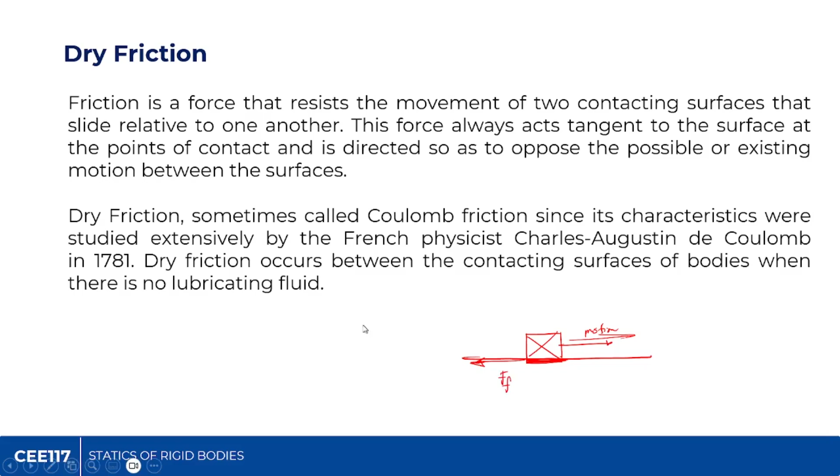Now, dry friction, sometimes called the Coulomb friction, since its characteristics were studied extensively by the French physicist Charles Augustin de Coulomb in 1781.

Dry friction occurs between two contacting surfaces of bodies when there is no lubricating fluid. Kaya sinasabi siyang dry friction. Kapag may lubrication na in between the interface or in between the contact surface, then that's a different type of friction, may fluid friction na yan involved.

Now, similar to this one, ito yung basically representation lang, no? In reality, yung makikita natin is a box only and a surface or plane. Kumbaga, ito lang yung makikita natin in reality. And then, of course, meron tayong weight ng box, then meron tayong force na in-apply, that is force P.

Pero, kung titingnan natin yan in microscopic level and in mechanics na sense, etong surface na to dito, contact surface, meron tayong tinatawag na etong change of force sub n. So yung change of force sub n, that is basically yung frictional force natin.

That is a function of your normal force here. So, pag meron tayong weight and meron tayong contact surface, meron tayong tinatawag na normal force that is opposing the force of the weight. So, itong frictional force is actually an expression or a function of your normal force.

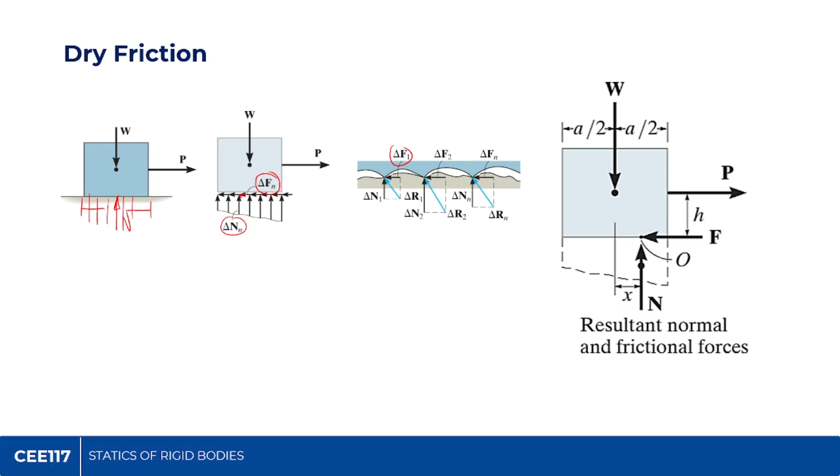Anyway, this is just basically the representation, no? But the same concept applies. Yung friction is always opposing the motion of an object.

Now, we have here the dry friction still. The theory of dry friction can be explained by considering the effects caused by pulling horizontally on a block of uniform weight W which is resting on a rough horizontal surface that is non-rigid or deformable. So, meron tayong tinatawag dito na impending motion. Then, meron tayong weight, meron tayong normal force in here, and then, ito yung frictional force natin. So, meron actually itong different cases.

Meron tayong impending motion. Pag sinasabi natin impending motion, yung object natin is still on the verge of movement. Hindi pa siya nag-move, pero nasa kanyang maximum limit na. Now, any increase in the force na in-apply natin on that specific object, that will cause the object to move.

Kaya tinatawag siyang impending motion. So, meron din tayong motion, mean to say, nag-move na yung ating object. And meron tayong motion, impending motion, and completely static siya. So, itong impending motion and completely static, basically, part pa rin ito, the same region lang to class. Later, pakita ko sa inyo yung friction times motion diagram niya.

So, in impending motion, in cases where the surface of contact are rather slippery, the frictional force F may not be great enough to balance P, and consequently, the block will tend to slip. In other words, as P is slowly increased, kung i-increase natin yung force na in-apply natin, F correspondingly increases until it attains a certain maximum value of Fs, called the limiting static frictional force.

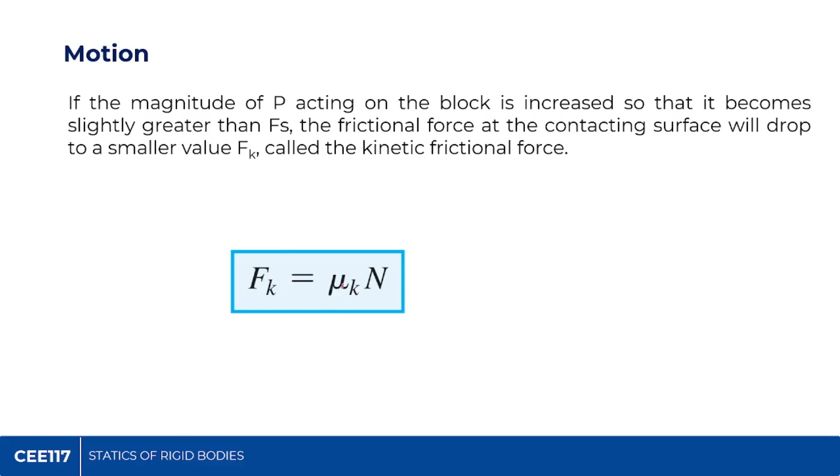Therefore yung contacting surface will drop to a smaller value Fk, called the kinetic frictional force. So yung kinetic frictional force denoted as F sub k is equivalent to the kinetic coefficient of friction times the normal force. Kung i-relate natin yung force at P, yung F pala, that is the friction, at P natin, ito yung applied force natin.

Okay, paano ba to i-interpret? Kapag nandito tayo, kung meron tayong straight line nito class, pag mag-straight line tayo, so what we can expect is that we have a linear equation wherein yung y natin is directly equivalent sa x, or a function of x siya. So most likely yan.

So meron tayong slope dito na 1. Kung slope 1, of course yung angle niya directly is 45 degrees, kasi yung tangent of 45 degrees equivalent yan sa 1. Yung tangent of that degree is equal to the slope. Tama ba? Ganyan man, di ba?

So kapag yung P natin is exactly equivalent sa force o frictional force, then we can expect no motion at all. Wala siyang motion. Okay, so at this region wala siyang motion. Or pwede din natin sabihin na yung force P natin is lesser than F, so walang motion dyan.

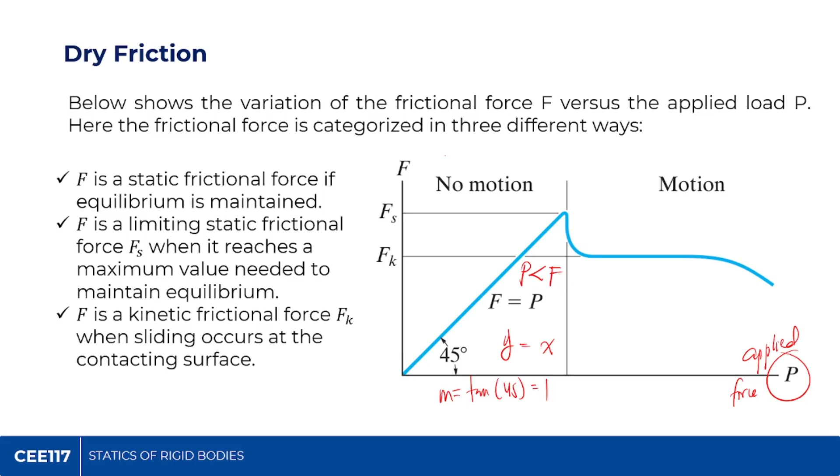Tatlong cases to class. Again, yung F natin is tinatawag nating static frictional force kapag ang equilibrium is na-maintain. F is called the limiting static friction kung yung F of S ay na-reach o na-obtain. Kapag yung F will cause the sliding, meron tayong sliding occurrence sa ating object, yung F na frictional force na nakuha natin is what we call the kinetic frictional force.

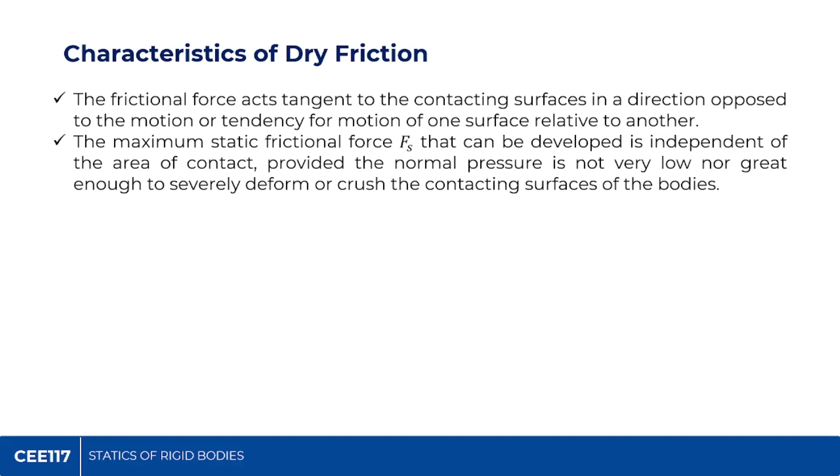Okay, so characteristics ng dry friction class: the frictional force acts tangent, yun sinabi ko kanina. And the maximum static frictional force, o tinatawag nating limiting static frictional force, that can be developed is independent of the area of contact. So regardless of the area siya, provided that the normal pressure is not very low nor great enough to severely deform or crush the contacting surfaces of the bodies.

The maximum static frictional force is generally greater than the kinetic. So yan yun, yung F sub S natin is generally greater always with Fk. So F of S is greater than F of K. Okay, yung force na i-require natin.

Or yung force na kailangan natin ma-reach so that yung object is mag-move. That is your F of sub S, the frictional force. That is always greater than the force na kailangan natin ma-reach while the object is moving already. Okay, yan yung ibig sabihin dito.

Meaning to say, for example, meron tayong object, parang wheel. Initially at rest siya, di ba? So, ang frictional force na present sa kanya is yung F limiting or F of sub S, or simply F lang. Hindi yung Fk, kasi it remains at rest.

So, kung mag-move ka nito or mag-apply ka ng force diyan sa itong wheel na to so that it will move, you need to go beyond the frictional force static para ma-move yung object. Meaning to say, you need to exert more effort than F of S para mag-move yan.

So, any questions so far, class? May tanong ba? Hello? Still there? May tanong, class? Sir, yes, sir. May tanong? Wala, sir. Okay, sige.

Example problem 1 tayo. Sabi dito, the uniform crate shown has a mass of 20 kilograms. If a force P is applied to the crate, determine if it remains in equilibrium. Sabihin natin na we need to determine if it remains static or no motion at all. The coefficient of static friction is 0.3.

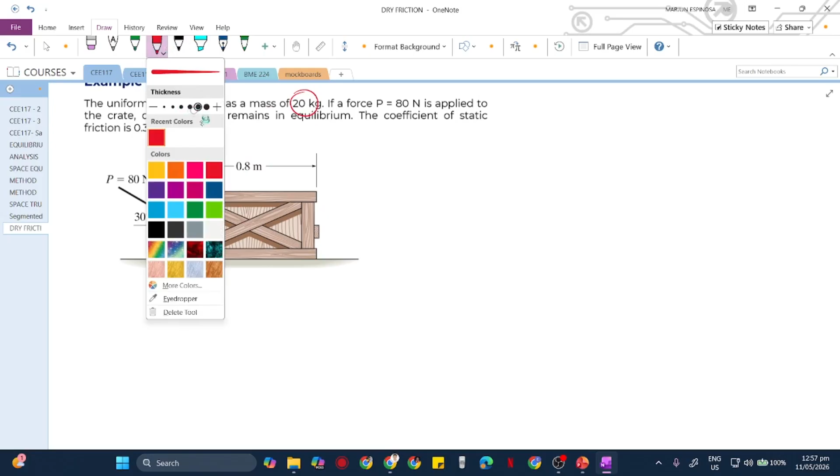Okay, so unang gagawin natin is gawa tayo ng free body diagram. Meron tayong mass ng block, so of course we can expect a weight. Pagpalagay natin yung weight nito, galing dito papunta dito. Ito yung weight niya, 20 kilograms times 9.81.

Yan yung weight niya. And then, of course, meron tayong tinatawag na frictional force, normal force. Yung normal force dito yan, that is x distance from the centroid. Ito yung magiging centroid natin, normal force. Okay, and then, of course, pag may normal force tayo, we can expect a frictional force. Sabihin na natin F.

Okay, meron tayong frictional force dito yan, sa interface ng mismong object at saka yung surface natin. Now, meron tayong in-apply na 80 Newton na force, that is inclined, 30 degrees from the horizontal. And that is 0.2 from the surface. Okay, so basically this is your H.

So, i-determine natin kapag yung F natin is equivalent sa P, mean to say, it remains equilibrium. Okay, so ang gagawin natin, we will be applying the equations of equilibrium.

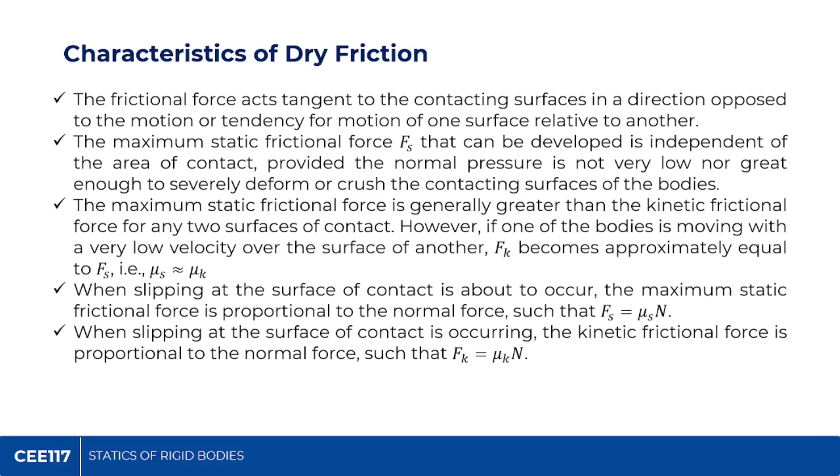So, we will be needing to solve using the normal force, yung mga tinatawag nating equilibrium equations. Balik lang tayo saglit konti, pakita ko lang ulit yung diagram nun. Yung normal force natin is naka-locate yan x distance from the center of your object or box.

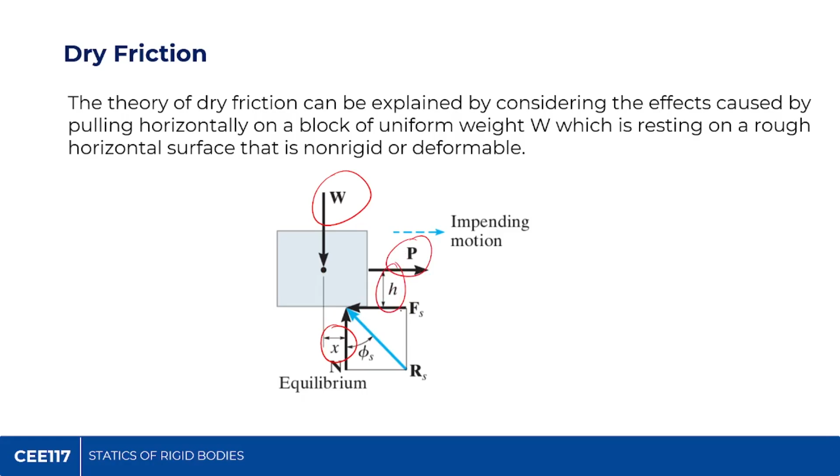So meron din tayong application ng P, which is h distance from the contact surface. So just to have a tawag nito, background, that is basically your H. So ang gagawin natin ngayon is to use na yung mga equilibrium equations.

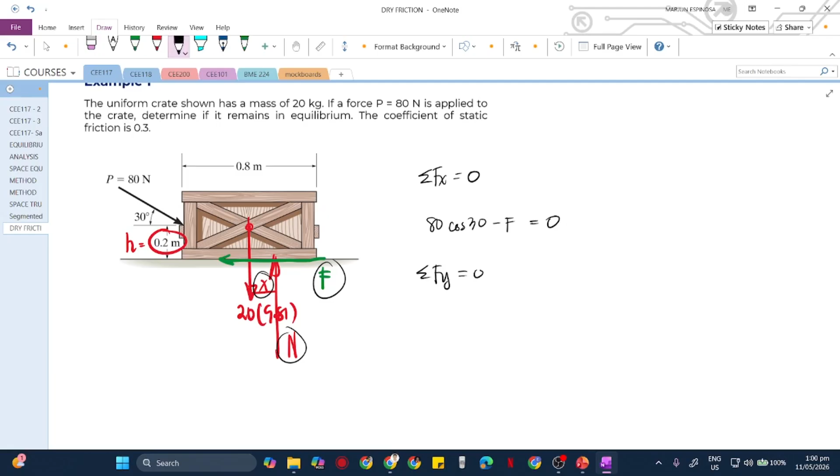So we can start with the summation of forces along X, equate that to 0. So anong mga forces involved here? We have here 80, then that is cosine of 30, and of course yung F natin. Equate that to 0, tama ba? Then another one is yung summation of forces along Y, equate that to 0. So this is basically our equation number 1.

Okay, for summation of forces along Y, so we have here yung 80 newton, since yung arrow niyan is pababa, so meaning to say yung vertical component niya is negative. Negative 80 sine of 30. And aside from that, we have N, yung normal force, at saka yung weight natin, which is 20 times 9.81. That is negative also. Equate that to 0.

So simplify natin to further, class. We have here 80 sine 30. Anong value nitong 80 sine 30? Kunin na natin yung calculator natin. 80 sine 30. Then i-add natin tong 20, kasi since they have the same lang man din negative, so add na lang natin yan. 9.81. So makukuha natin yung value ng N.

236.2. So dito pala makukuha pala natin yung value ng F. Summation of forces along Y equated to 0. So ito yung value ng N natin. Yung value ng ating F would be equivalent sa value ng F dito. Transpose natin sa kabila yung F, magiging positive, 80 cosine of 30. Yung F natin dito would be equivalent sa 69.28. Okay, sabihin natin 69.28 newtons. So yan yung F natin na value. Tama ba? And yung normal force natin is 236.2 newtons. Tama? Hindi, class.

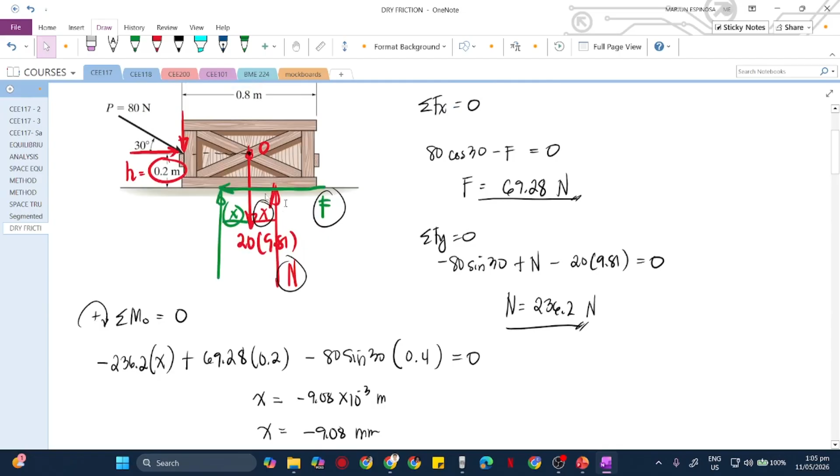So, i-test natin ano ba yung maximum na F value na makukuha natin considering meron tayong coefficient of static friction tapos nakuha na natin yung value ng n. So, that is basically 0.3 tapos ma-multiply natin yan by n. Ano yung nakuha natin na n?

236.2. Anong value to, class? Makukuha natin. Anong value makukuha natin dito, class? 70.86, sir. Okay, 70.86, or 86 na lang Newton. So nakuha natin yung maximum friction or kinatawag natin na maximum limiting frictional force, equivalent sa 70.86.

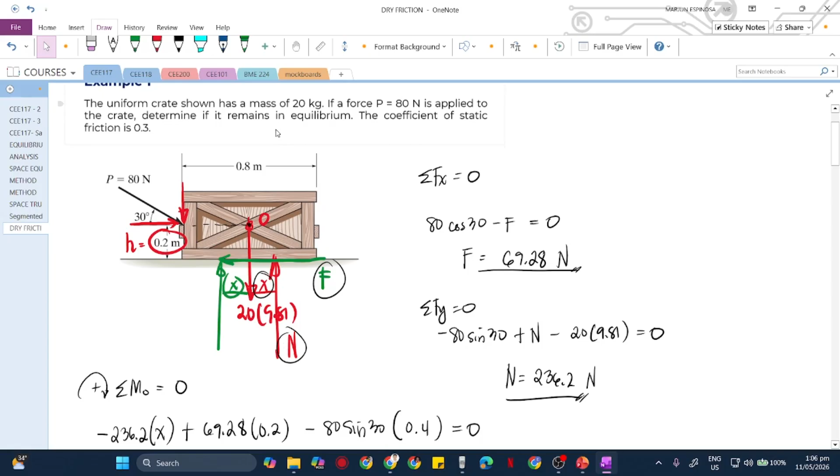Now, kung atin yang i-compare dito sa nakuha nating F value, upon summing the forces along X, by the way class, meron pa tong tanong, determine also the value of X, or the normal force, or the distance from the normal force. Kaya kinuha natin tong X, hindi ko lang nasulat, class. Meron yung tanong dito, so part yan sa tanong.

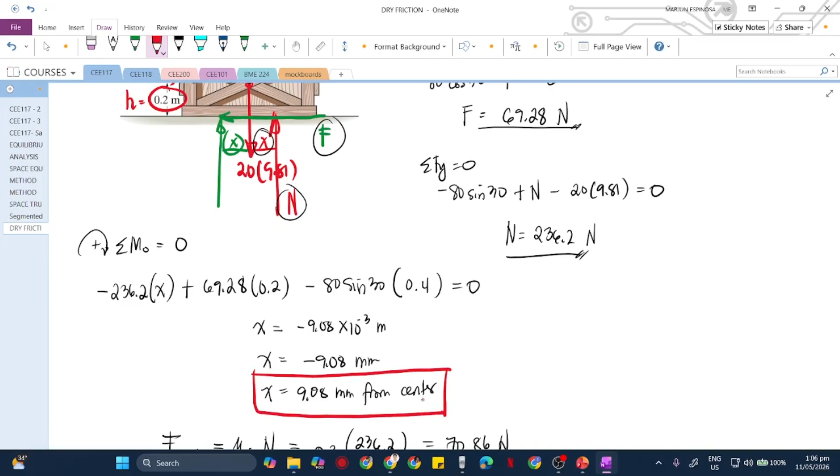And yung isang tanong, determine if it remains in equilibrium. Since yung F natin na na-solve, which is equivalent sa 69.3 Newton, is lesser than the maximum limiting static friction, or say 69.3 is lesser than 70.86 Newton, therefore, what happens is yung object natin will remain or not remain equilibrium? Ano sa tingin nyo, class? Not, sir. Not?

Diba kung i-draw natin yung F tapos P, parang kumbaga ganyan. Sabihin natin ito yung maximum natin, maximum F. Then nakuha nating F nandito lang. Kumbaga gagawa tayo ng parang projected line F. So, ito yung value ng P kung saan no motion at all. Yung F na nakuha natin, 69.3, nandito lang yan. Ito yung 70.86, ito yung 69.3.

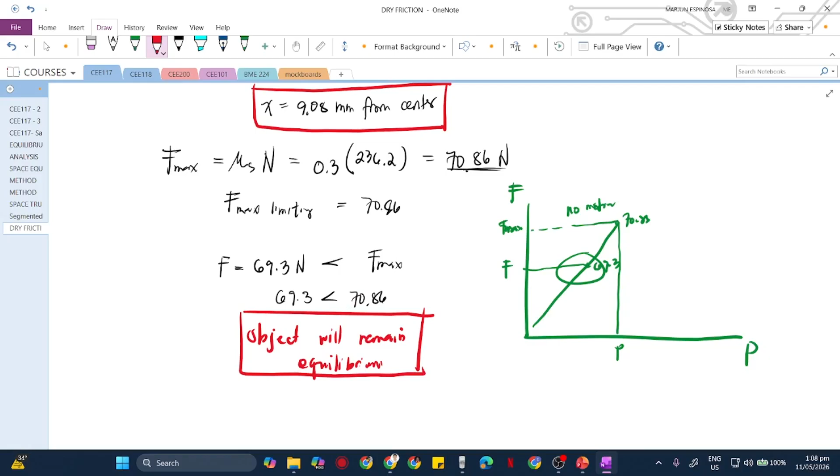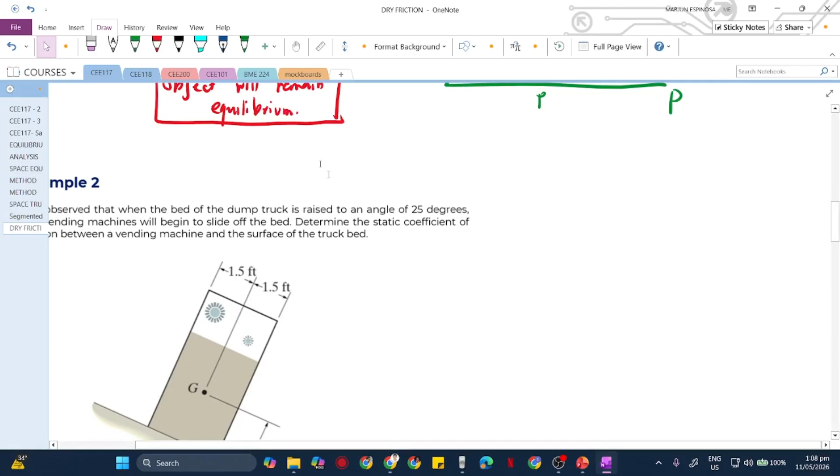So, anong mangyayari sa object natin? It will remain what? Equilibrium. So, wala tayong tinatawag na motion, object will remain equilibrium. Yan yung sagot dyan. Kapag yung F na nakuha natin is lesser than the maximum F, mako-consider natin that your object will remain static or equilibrium. Basically, madali lang yan, class. So prove lang natin whether the object will remain equilibrium or not. So, additional problem tayo, problem number 2. Ang tamang sagot nyan, object will remain equilibrium.

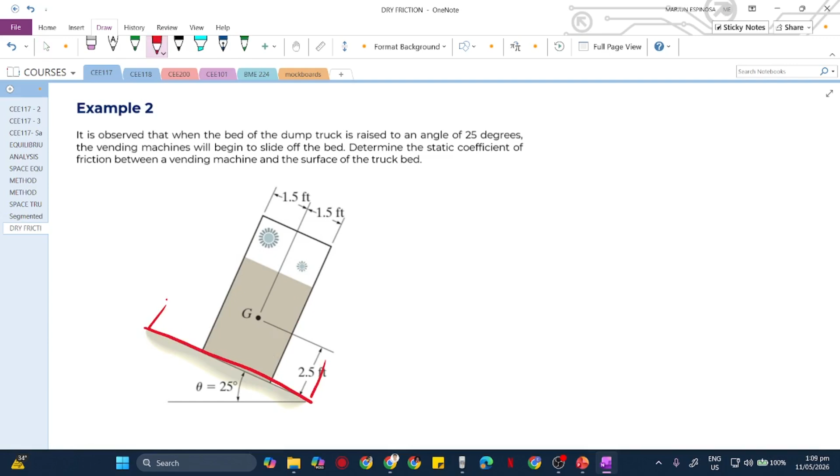Okay, example problem 2 tayo, class. It is observed that when the bed of dump truck, parang meron tayong dump truck, is raised to an angle. Ito yung parang dump truck, bed of the dump truck. Parang ganito ba? Meron tayong dump truck, meron di ba itong hydraulic, parang kumbaga ganyan. Then, meron tayo dito yung tawag nito, yung wheels ng dump truck, ganyan.

Then, meron tayong ganito niya. So kung saan yung driver is, driver compartment. Parang ganyan ba? So, meron tayong ganito pa dito. Ganyan, no? So, ganyan yan. The bed of dump truck is raised to an angle of 25. Na-raise yan to angle para mahulog to, kumbaga. So meron tayong vending machine, ito yon, will begin to slide off the bed. So, mag-slide off yan, papunta yan dito.

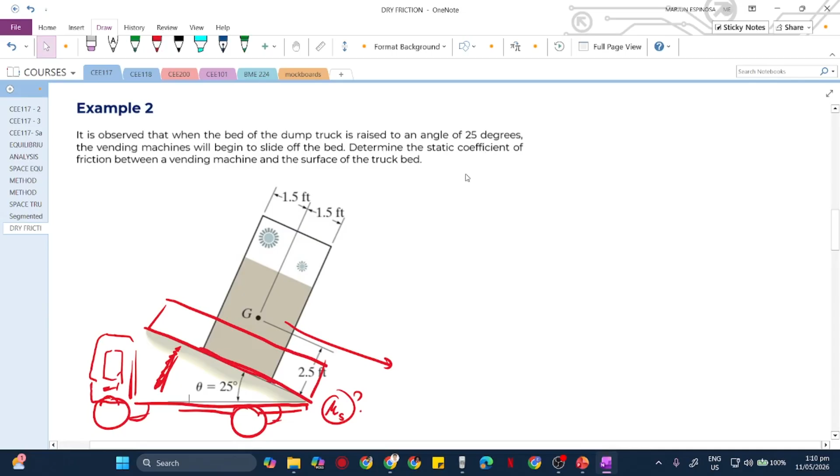Now, determine the static coefficient of friction. Ano yung value ng μs, static coefficient of friction, between the vending machine and the surface of the truck bed. Considering meron tayong 25 degrees, paano natin kukunin yan, class? Gawa tayo ng free body diagram for that one. So, gawa tayo ng ating itong surface na to. Then, say for example, yung vending machine, sabihin na lang natin ganito, object. Parang box lang, para madali.

So, meron tayong weight ng vending object or yung vending machine natin, of course. Ano yung weight natin dyan? Binigay ba? Hindi binigay yung weight. So, pagpalagay natin, that is W na lang. Pero may weight yan, ha? And then, eto, 25 degrees to, di ba? 25 degrees.

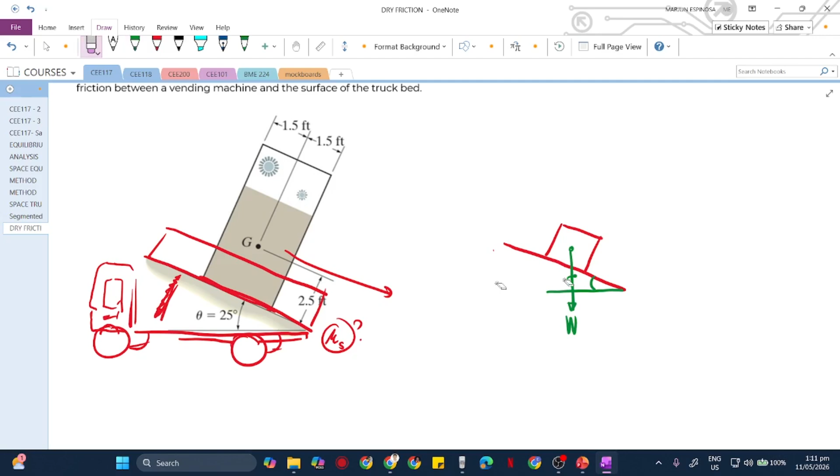Okay, hold on, alitan na natin konti. So, this one is 25 degrees. Meron tayong weight dito. And then, aside from that, since yung object natin nag-move dito, yun yung motion, of course you will be expecting a frictional force in this direction. Meron tayong frictional force in this direction, sabihin natin F yan. Ay sorry, nawala. Okay, sabihin natin, meron tayong frictional force in this direction. And then, aside from that, meron pa ba tayong nakalimutan? Of course, yung normal force natin. Normal force natin, then from the center, meron tayong X dyan.

Now, ang gagawin natin, class, para mas madali, is gagawa tayo ng arbitrary x prime or x and y axis. So gagawa tayo ng arbitrary x and y axis, gawin natin x prime and y prime. Such that if i-rotate natin to, okay, i-rotate natin yan, so ang mangyari niyan, ganito. We have here the y prime, yung arbitrary y prime axis natin. And then we have here the arbitrary x axis naman natin.

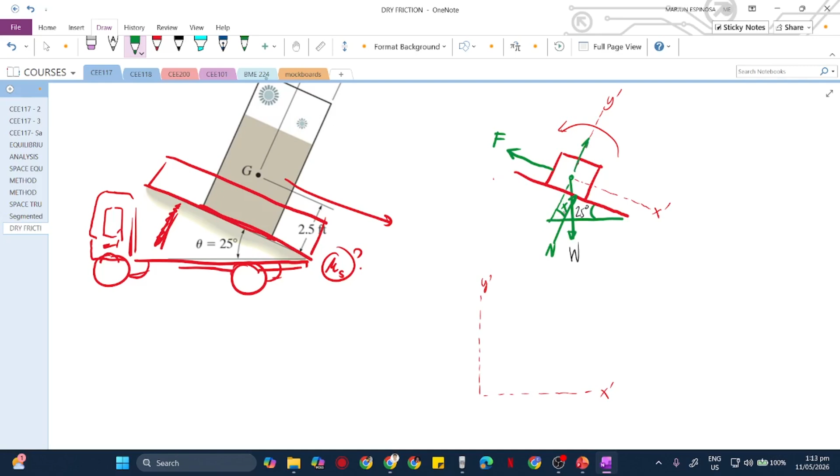So, let's put in the forces involved. Let's place here the F, the frictional force, although we know that is in between the contact surface. And then the normal force, we place it here, although we know that has an X value from the center. So for simplicity, we have here the N (normal force), the weight, and the friction.

The weight, from the vertical component - whatever angle we have here, that's the same angle here. So our weight, when arranged like this, class - we have here the y prime, then that is 25 degrees from y prime. So that is your weight.

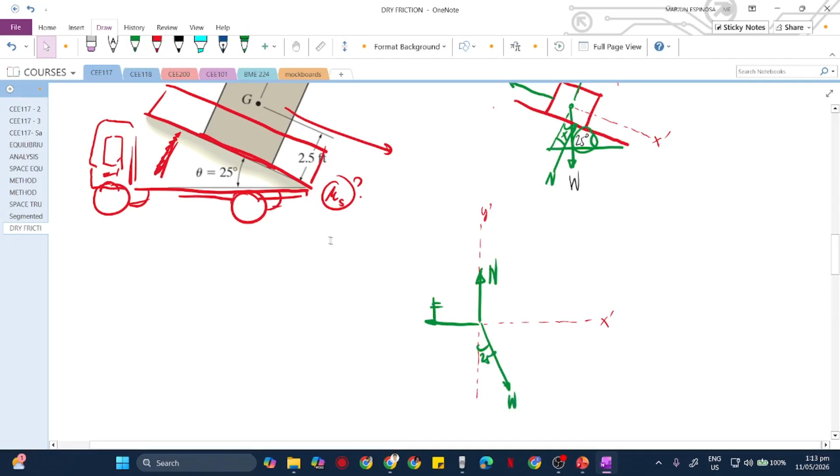Static or kinetic friction. So first, summation of forces along y: we have N minus W cosine of 25 degrees, equate that to 0. Therefore our N is W cosine of 25 degrees. So that's our N. That is our first equation. Now for the second equation, summation of forces along x, equate that to 0.

So what's along x? We have the horizontal component of W, W sine of 25 degrees - sine, because that is opposite to the 25 degrees. And then minus our F, which we're solving for, equate that to 0. Our F is equivalent to mu s times N. So we have mu s times N, and then we have W sine 25. Equate that to 0.

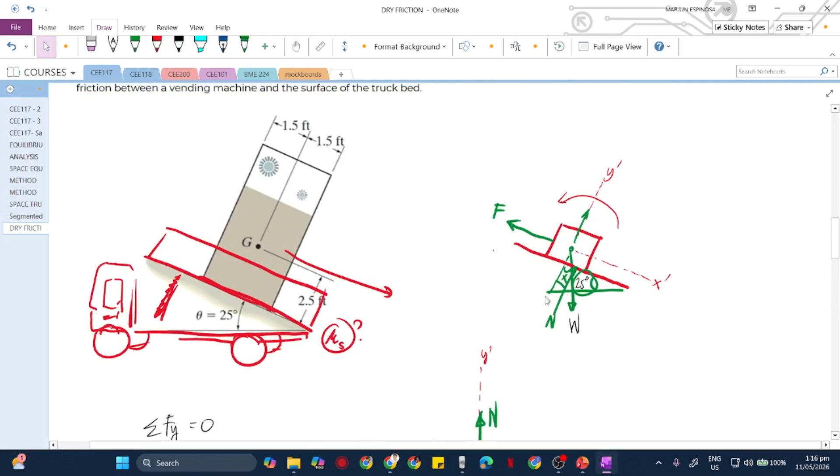So basically the coefficient of static friction is basically equal to, class? That is sine of 25 over cosine of 25. Or in other words, that is just tangent of the angle of incline. So that's this part.

0.47, sir. 0.47, 466, or just 0.466. That is our value for the static coefficient of friction.

Now, the angle, the 25 degrees here is referred to as the angle of repose. So that angle of 25, aside from being the angle of inclination, is also called the angle of repose. And by comparison, it is equal to the angle of static friction. So here we proved that the angle of repose, or the angle theta, is also called phi, or let's just say angle theta.

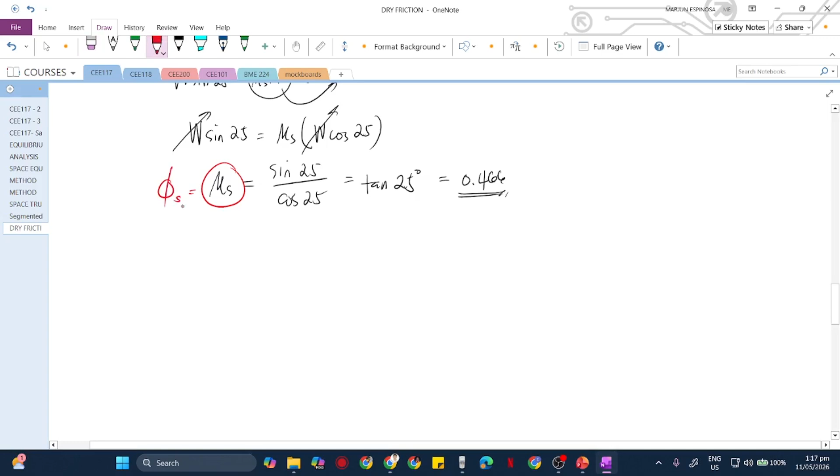And then mu s, let's say that is the angle of static friction, or phi of static friction. So the angle of repose is equivalent to the angle of static friction. Because the angle of static friction, if we get the arctan of this, we get the angle of static friction. That's its definition. So they're equal.

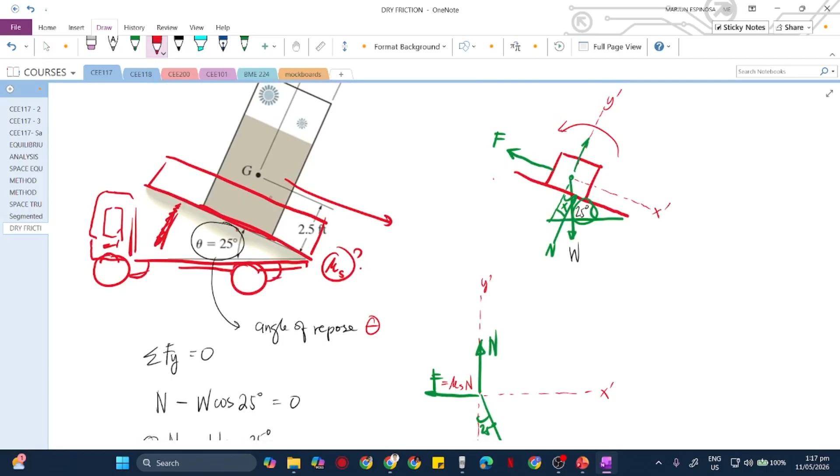Notice that the calculation shows theta is independent of the weight of the object. So theta, the angle of repose, provides a convenient method for determining the coefficient of friction. So the easiest way to get the static coefficient of friction is basically you just need to get the tangent of this angle of repose.

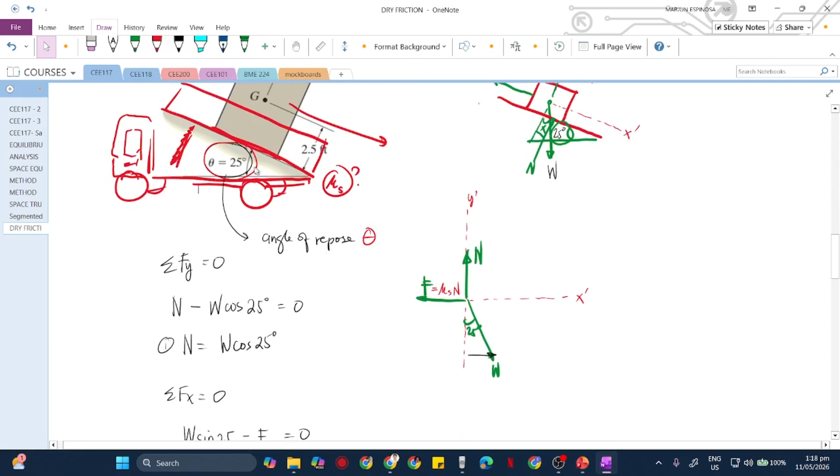So that's it. Basically this problem is just proving that whatever angle of repose you have, you can get the static friction considering the same case as this. So that is equivalent to the tangent of your angle of repose. That's the static coefficient of friction.

Okay, let's continue class, example 3 now. Let me read the problem again. Beam AB is subjected to a uniform load of 200 newtons per meter.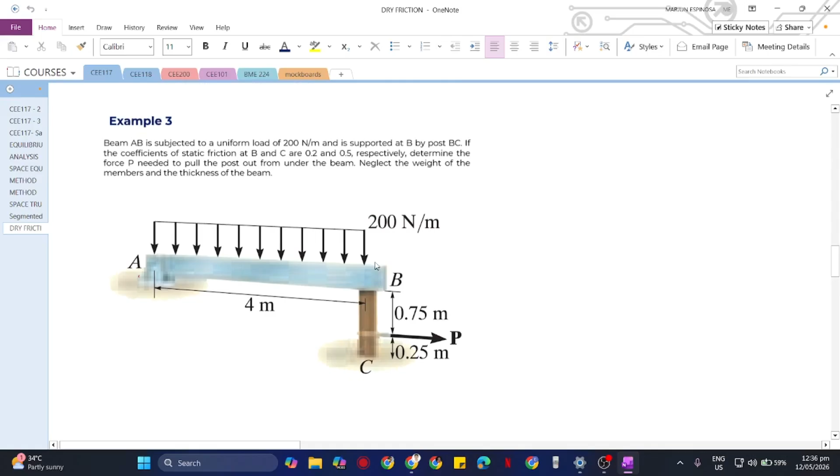So as you can see, we have a post here, BC, and it is supporting the beam AB. So the question here is, what is the magnitude of force P needed to pull the post BC out.

So let's create a free body diagram. First, the beam AB. Let's draw the arrow here. We have AX, and then we also have AY, because it is pinned there.

Okay, we got this yesterday already. To get the resultant, that is 200 times 4, and that is located at the center of this beam, which is equivalent to 2 meters from A or from B. So this is 800 newtons.

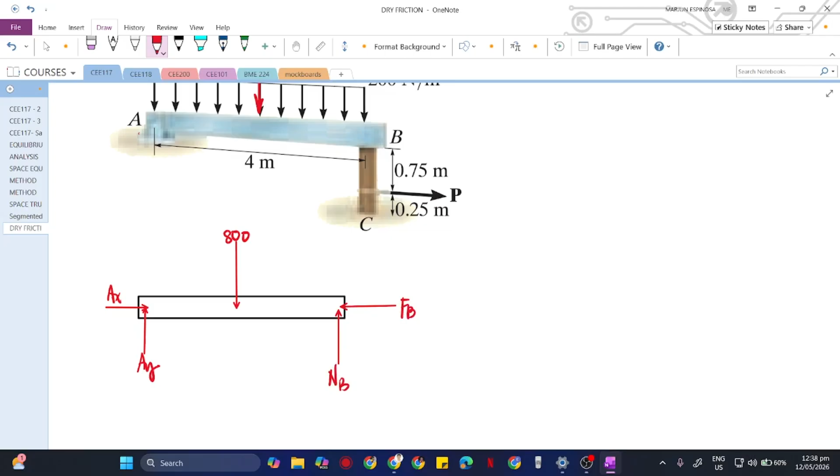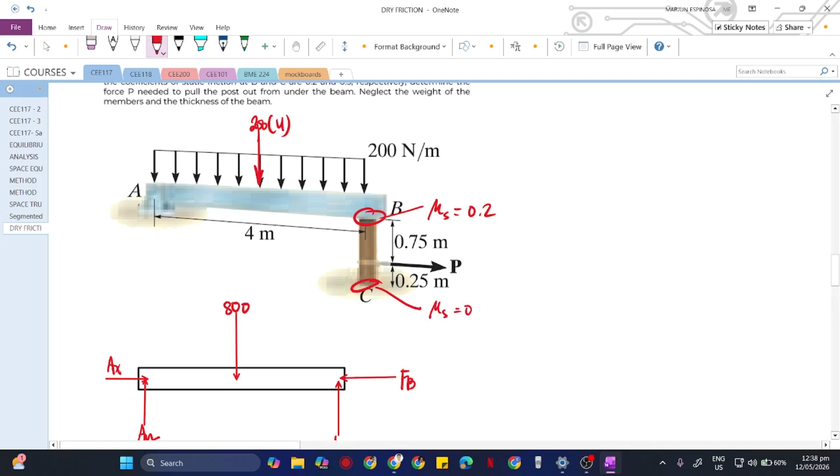Let's call this NB, and this is FB. So we have the coefficient of friction here. The static coefficient of friction given is 0.2 here, and over at the ground, the contact surface between the ground and the post, the static coefficient of friction is equivalent to 0.5. So those are our coefficients of static friction.

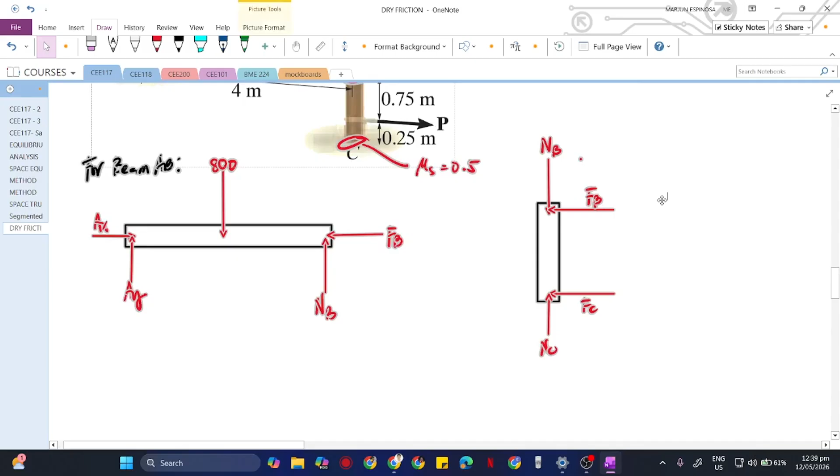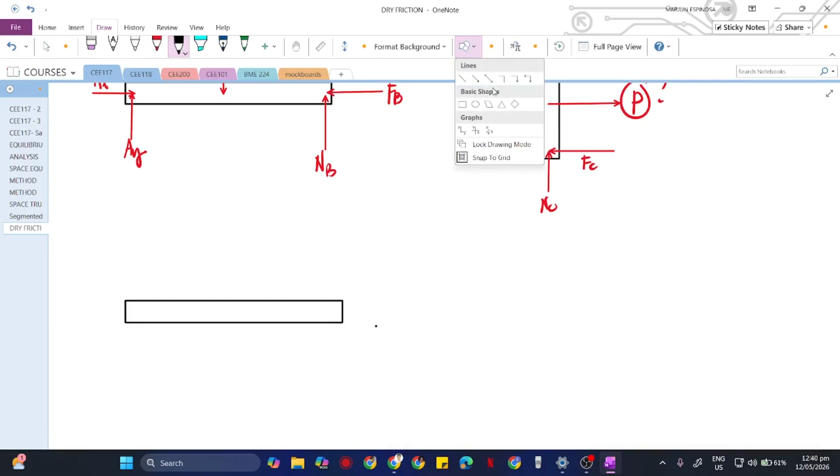Force P. Okay, like this. So there are two possible scenarios here, class. There are two possible assumptions we can make. First, let's draw our beam AB again, and let's also draw our post BC again. There are two possible scenarios for this one if we pull a force here, or exert a force P.

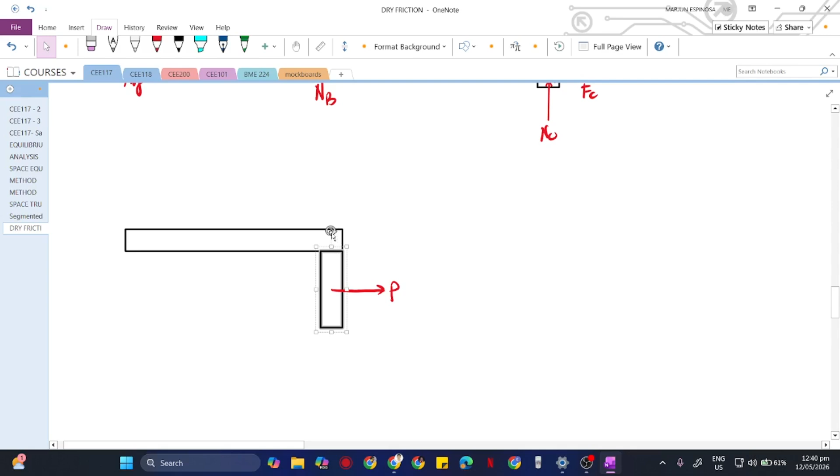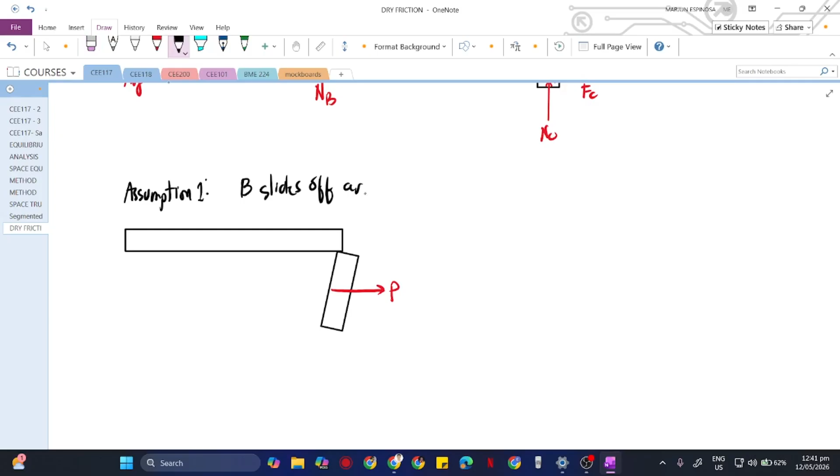The tendency is for it to slip at the contact surface. First, at B. So what could happen is this slides first. For our first assumption, assumption 1 is that B slides off around C, meaning the post rotates while C remains fixed. Only B slides off. In that way, we can still pull the post out. Is that right, class?

And the other scenario is this. Let's draw our beam and our post again, with force P still present. The other scenario is that C slides off instead. So basically B stays fixed, and C, this point here, slides off first before B. So this is our assumption 2.

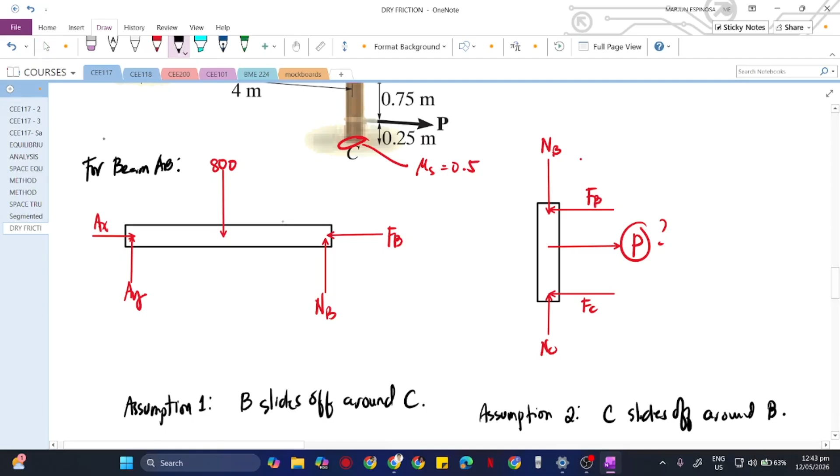Now let's start with assumption 1, then we'll test if our assumption is correct. To validate assumption 1, let's call this our free body diagram number 1, and this is free body diagram number 2 for post BC. What we'll do is use free body diagram 1 and take moments about A.

Equating that to zero, we take moments at A. The only moment is this 800, which is 2 meters from A, and of course this NB, which has a moment arm of 4 meters from A. So this is 0.75 here.

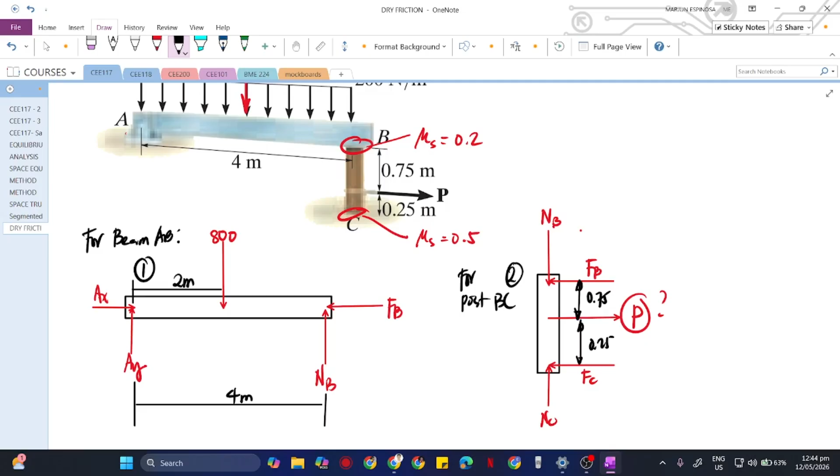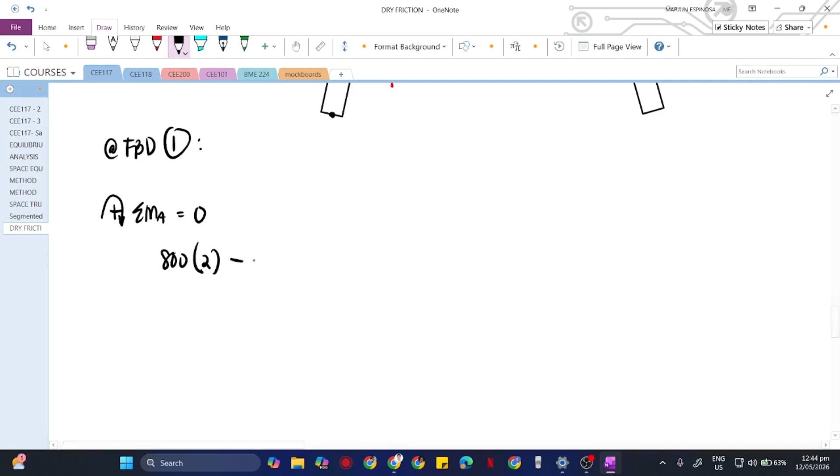Although hindi accurate yung magiging diagram, anyway basta ganyan yan. So basically, sabihin na lang natin clockwise yung positive. Therefore, we have 800 times 2 minus NB times 4, equate that to 0. Wala nang other magmo-moment dyan sa point A kasi 800 lang at saka yung NB.

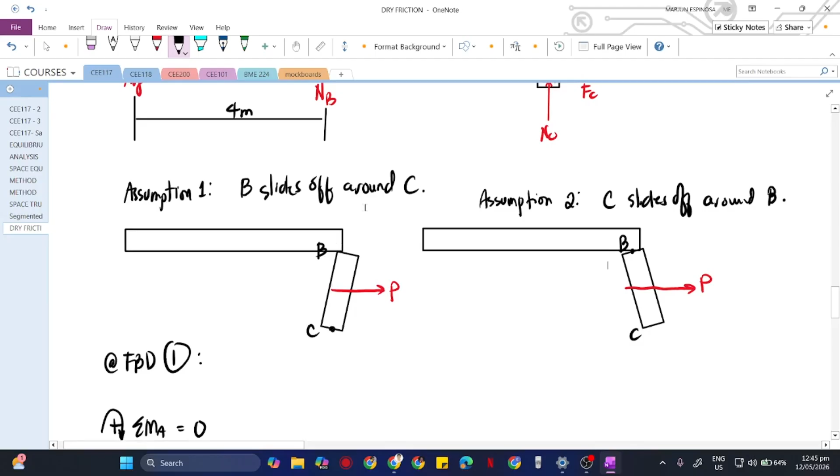Now kung i-assume natin itong assumption 1, ang mangyari niyan, magmo-moment tayo dito sa point C. Okay, ito yung C, di ba? Bakit tayo magmo-moment dito sa point C? Kasi sinabi natin na ang unang mag-slides is itong sa B natin, contact surface natin sa B, and then it will slides off around C. Kumbaga, parang magmo-moment siya sa point C or magro-rotate siya around C. So gagamitin naman natin yung free body diagram dito sa 2.

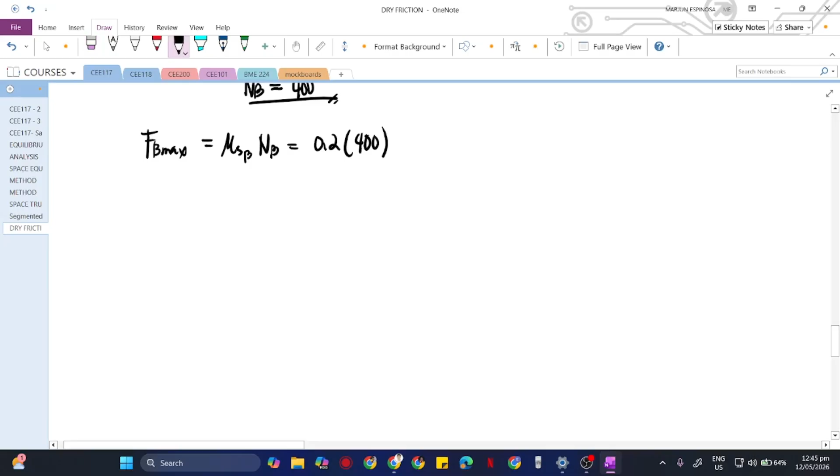By the way class, if NB is equivalent sa 400, then therefore using yung FB max pala natin, yung maximum limiting frictional force natin for at contact surface B is equivalent sa static coefficient nitong sa B times yung NB, which is equivalent sa 0.2 times 400. Tama ba? Okay, ang sagot dito, that is 80 newtons. Tama? Yan yung FB max natin, yan yung gagamitin natin na FB dito sa poste na to. Okay, meaning to say, yung FB natin, in-assume natin that is equivalent sa FB max natin.

So nandito tayo sa tinatawag nating impending motion. Pag yung FB natin na nakuha is equivalent sa FB max or lesser than, equivalent or lesser than FB max, then nandun tayo sa no motion or impending motion. Okay, so gagamitin natin tong value na to, kung gagamitin natin yung assumption 1. So assumption 1, balik tayo dun sa free body diagram number 2.

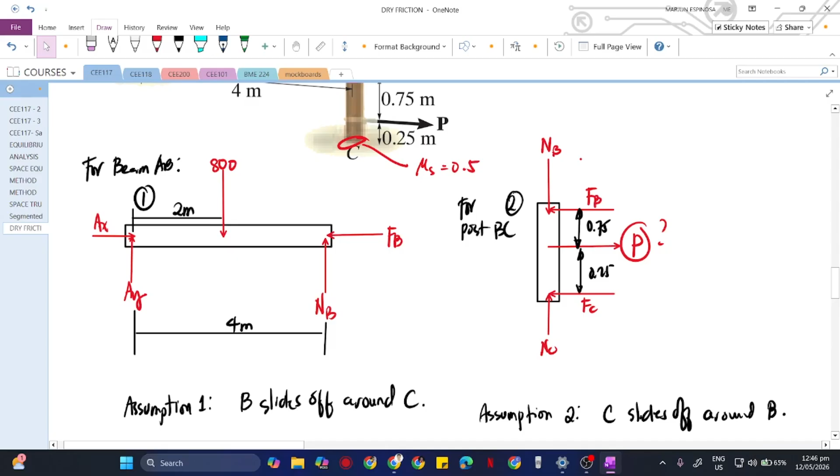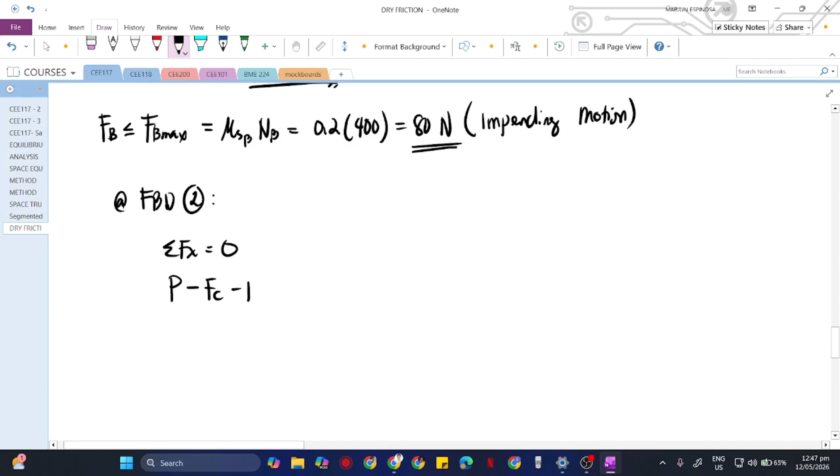Medyo mahirap ito intindihin, class, no? Pero you will understand later why. Ito, so gagamitin natin tong free body diagram na to solve for the value of P. Okay, summation of forces along X, makukuha natin that itong P natin is equivalent lang pala sa P minus FB minus FC. Kasi yung FB natin at saka FC is pareha sila papuntang kaliwa. Okay, P minus FC minus FB equivalent to 0. So this is our first equation.

Now if we also sum up the forces along Y, equate that to 0, same pa rin sa FBD number 2. Yung forces along Y lang is dalawa lang, NC at saka NB. So therefore pala yung NC minus NB, or in other words, yung NC pala is equivalent sa NB. Yung NB nakuha natin kanina is 400 newtons. So yan yung gagamitin natin na value.

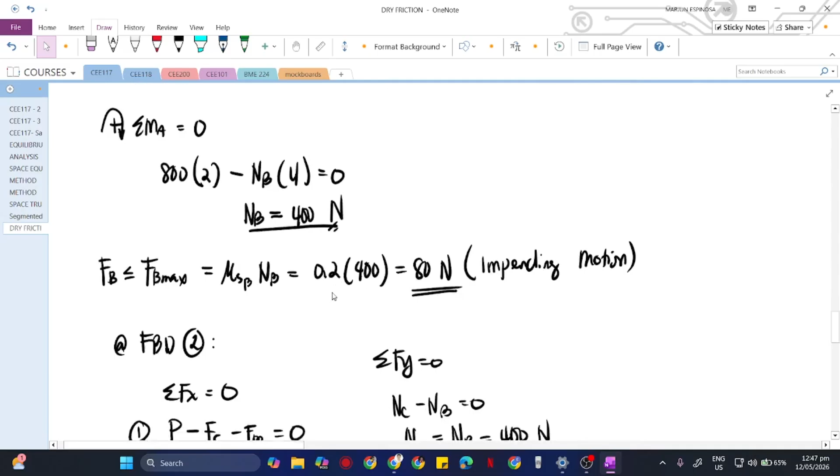Okay, at the same time, kung gagamitin natin yung assumption number 1, if we take the moment dito sa point C, same pa rin free body diagram number 2, equate that to 0, ano lang yung may moment dito class. Okay, dito tayo magmo-moment sa point C. So etong NB, wala na yung moment, no, kasi it will project o papunta dito, ma-intersect yan niya. Okay, NC at saka FC, wala din yan. So ano lang yung may moment?

P at saka FB. Ang P is 0.25 from C. Ang FB is 0.25 plus 0.75, which is 1 from C. Okay, so ito yung gagamitin natin, ha. Sige, sulat ko na lang dun, ay, ilagay ko na lang dun para meron tayong reference. Okay, so ito, lagay ko lang dito.

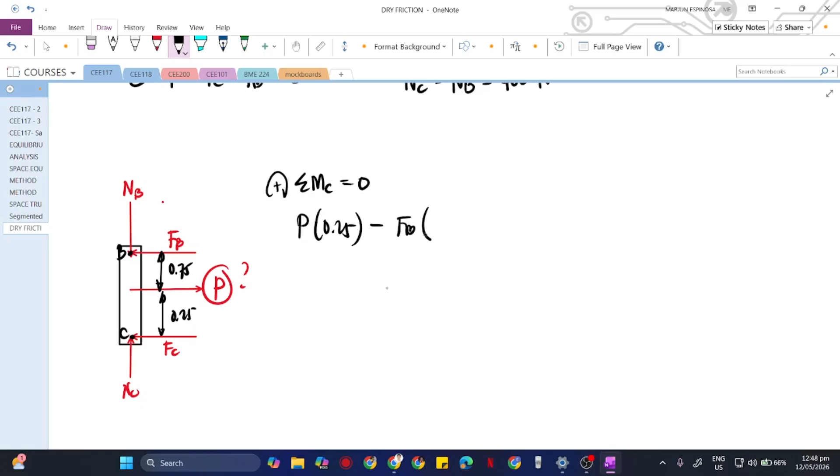So therefore, meron tayong, okay, magmo-moment tayo sa point C. Ito yung point B, ito yung point C. Moment tayo sa point C, we have there, sabihin natin clockwise positive, P times 0.25, okay, minus FB times 1, equivalent to 0. Since nakuha na natin yung FB kanina, which is equivalent sa 80, so therefore we get here 80 times 1, okay, transpose natin, over 0.25. Ang value nito, pakikuha class, 320. 320 newtons, so yan yung value ng P natin.

Pero hindi pa yan, hindi pa natin masasabi that is the exact value of P natin kasi itetest pa natin yan. Now using equation number 1, kung sinabi nating P is equivalent sa 320, okay, test natin to, ang value ng FC natin. So, 320 to minus FC. Then yung FB na kuha natin is, ano yun class? 80, di ba? Equivalent to 0. So yan yung value ng FB natin. Anong makukuha natin for FC here?

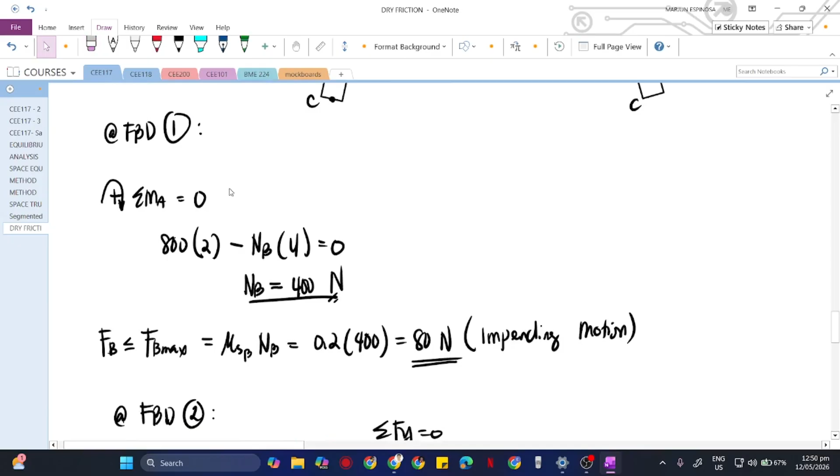Without transpose natin to, FC equals 240 newtons. Tama ba? Okay, 240 newtons. Itong value ng FC, ang magdedetermine kung tama ba yung assumption 1 natin o mali. Di ba sinabi natin sa assumption 1, yung B lang yung contact surface dito sa B lang yung nag-slide off.

Meaning to say, yung C nag-remain lang at rest at its position. Pero makukuha pa rin natin yung poste, di ba? Kasi hindi naman yan mapupull pa rin yung P niya. Okay, mapupull pa rin yung poste. So, it will just be yung B lang magsa-slide off around point C. Kanina nakuha natin na NC is equivalent sa 400.

Ano pala yung value ng FC max? Di ba, that is static friction sa C tapos NC, and that is equivalent sa 0.5, times 400. Okay, anong value makukuha natin dito, class? Di ba that is equivalent sa 200? Half of 400, 200 newton.

Now, nangyari dito, yung FC natin pala is greater than F max. Di ba yung F max is the limiting static friction, that is the maximum value of friction, of frictional force na hindi pa ma-move yung ating object. Pero sa nakuha nating FC dito sa assumption 1, nag-exceed na siya sa F max. So, anong ibig sabihin nito?

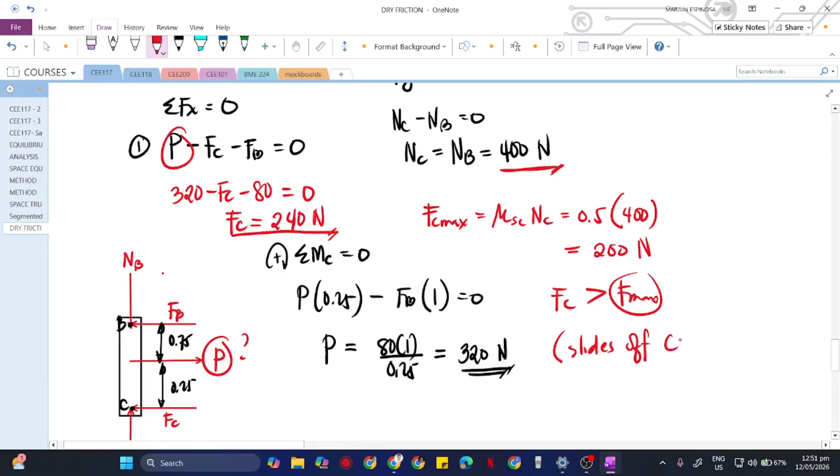Meaning to say, yung C pala ay nag-slide off na, hindi pa nag-slide off si B. Yung C is nag-slide off na, hindi pa nag-slide off si B. So, mali itong assumption natin na nag-slide off na si B around C. So itatry naman natin itong assumption 2 natin, which is yung C nag-slide off around B.

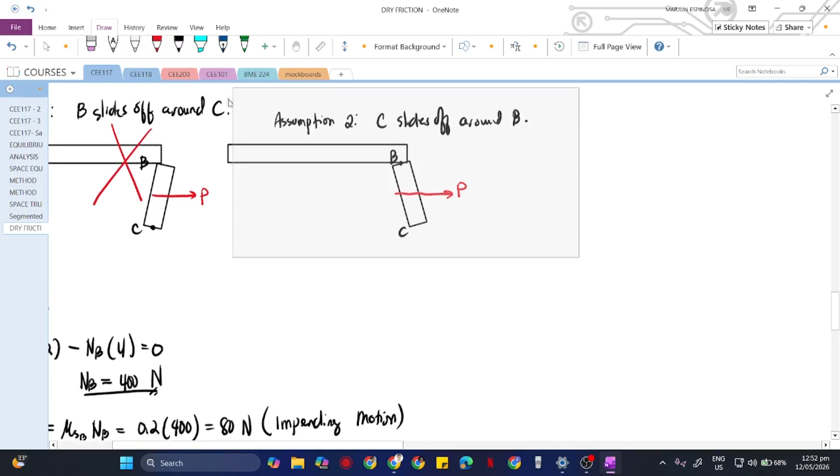Okay, so ang gagawin natin dito, meron naman tayong values ng NB at saka NC. Meron tanong? Wala naman siguro. Okay, so gagawin natin, copy ko lang to, i-move ko lang saglit.

Ayan, so di ba FC is greater than F max. So nakuha na natin, na-prove natin o na-validate natin na mali yung assumption 1 natin. So proceed tayo dito sa assumption 2. Dito sa assumption 2, gagamitin pa rin natin yung free body diagram sa number 2.

Wherein dito naman tayo mag-moment sa point B. If mag-moment tayo sa point B, summation of moment at point B equate to 0. Clockwise positive. So that would give us itong FB, NB, at saka NC, mag-0 na yan. So meron lang tayong FC, negative yan. FC negative, times 1, yan galing sa B.

Plus yung P natin, times 0.75. Equate that to 0. So sa FC natin, since impending tayo, sinabi natin na yung FC yung mag-slide off, o mean to say, ang gagamitin nating value ng FC dito is yung FC max. FC max, which is equivalent sa 0.5 times 400, which is again 200.

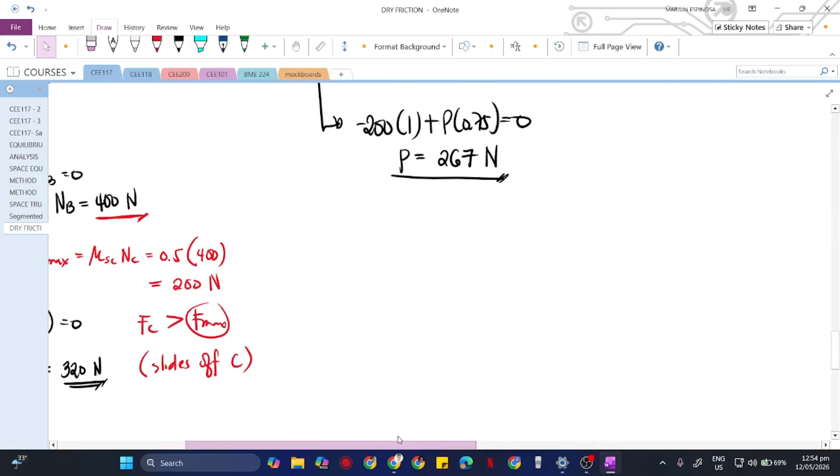Okay, now kung P is 267, gagamitin pa rin natin yung equation number 1. Hindi naman na-change yan, di ba? Summation of forces along X. If P is 267, saan na yun? If P is 267, so galing sa equation number 1, P minus FC minus FB, equate that to 0.

If P is 267 and FC is nakuha na natin, which is equivalent sa 200, yung ginamit natin FC max, 200, minus FB, anong value ng FB natin dito, class? 67, sir. Okay, 67. Now, magiging correct ang assumption natin na yung FB natin is parang nag-fix lang siya at nag-slide off first yung C kung yung FB na nakuha na yung FB max natin na makukuha is greater than or equal to FB.

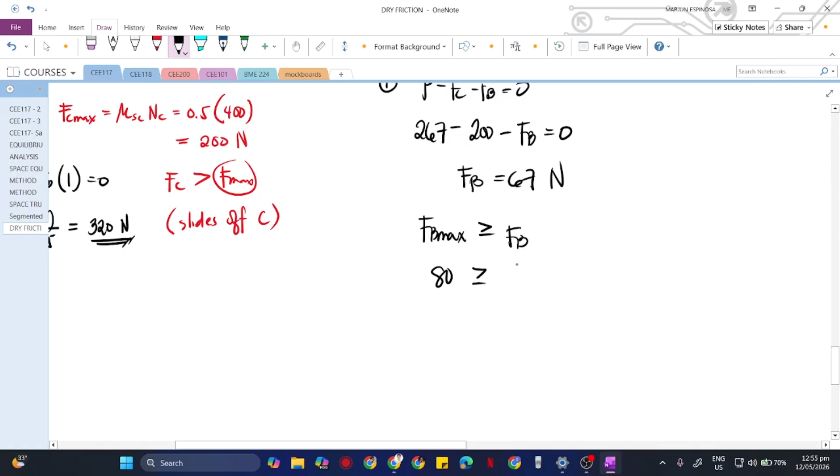So kanina, kinuha na natin yung FB max. Yung FB max natin is obviously equivalent sa 80. Sorry, kung yung FB max pala natin is greater than or equal, at yung FB na nakuha natin dito is 67. Anong ibig sabihin yan, class? Okay, hindi pa nag-exceed yung value ng FB na nakuha natin dito sa kanyang maximum limiting value. Meaning to say, it remains at rest pa.

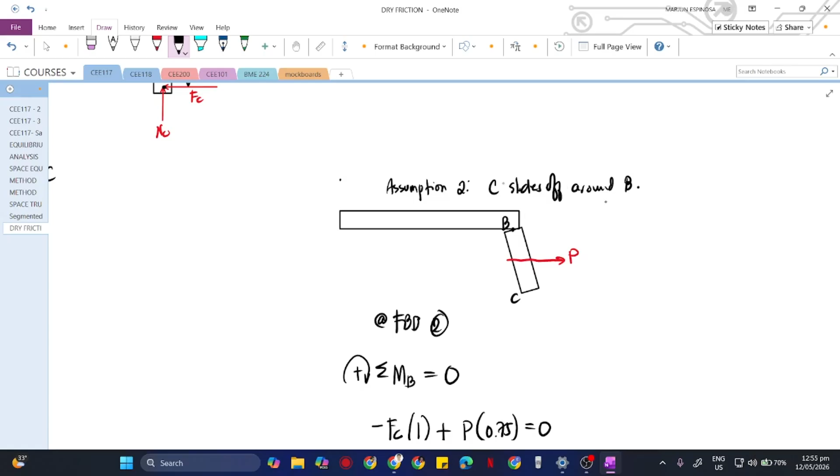It remains at rest, so nauna yung C na mag-slide off. So correct yung assumption natin na yung C ang nag-slide off around B. So whatever value na nakuha natin doon sa P is our answer. Okay, yan yung parang proving na part. That P is equivalent sa 267. Meron din madaling way into class. Ang gagawin nyo lang is itatry nyo lang dalawang method.

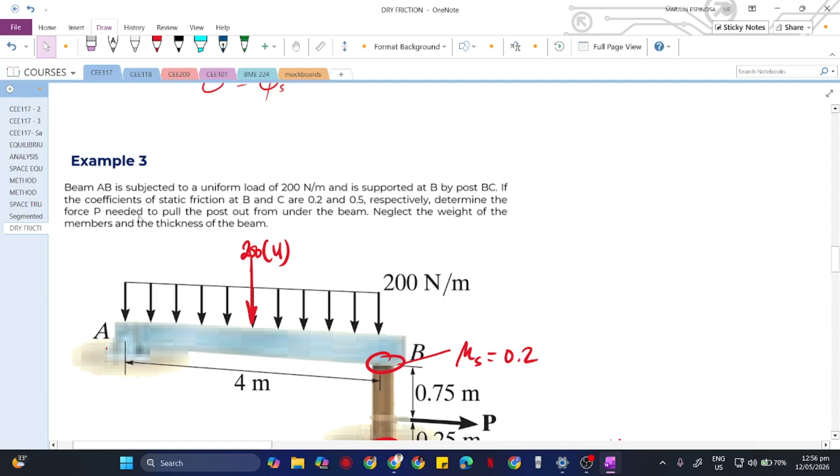Dito, magmo-moment kayo sa C at saka magmo-moment kayo sa B, and then whichever yung maliit, yan yung gagamitin niyo na value. Dalawang value mo ang P, 320 at saka 267. Yung maliit, meaning to say, that is just the amount. Anong tanong dito? Determine the force needed, parang sinasabi, determine the force P just needed or enough to pull. So yung lesser na value, yan yung enough na magnitude ng P na pwedeng gamitin natin para successfully natin ma-pull out yung poste.

So iyan yung parang tawag nito, interpretation para sa problem na to. There are two possible values for this one, which is 320 at saka 267, pero piliin niyo lang yung pinaka maliit. I hope that's clear to you.

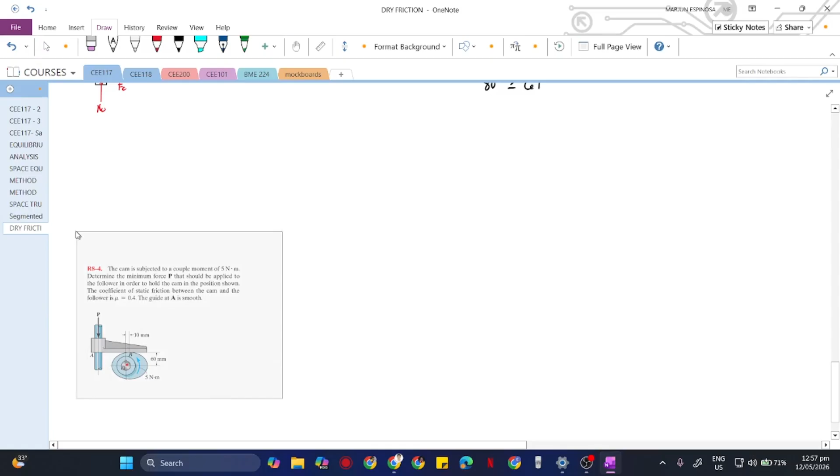Questions? Sige, before we proceed sa ating next problem. Sir, ako'y question po. Sige. Sure.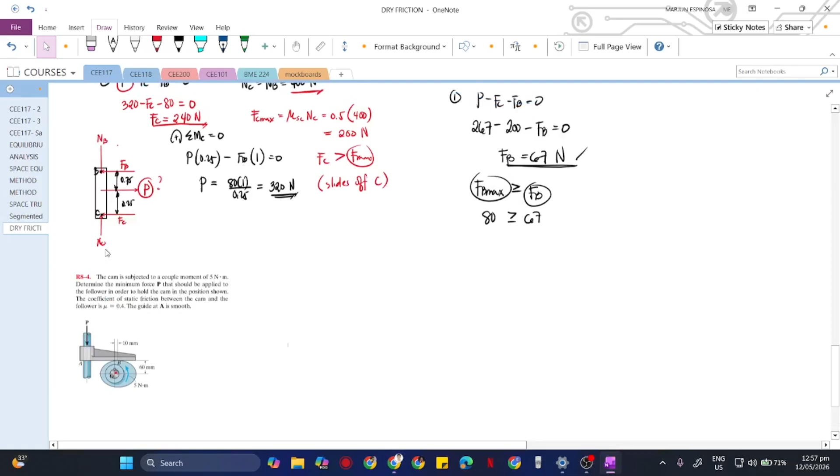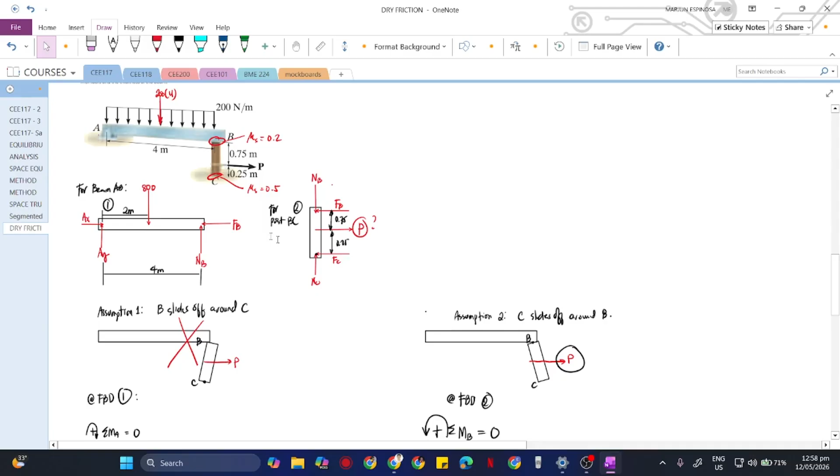Sir, dili mo negative si P sa pag-moment sa B? Dito sa moment sa B, yes po, dito ako nag-moment sa B. Okay, considering, nabaliktad lang, no? Pwede naman din, sabihin na natin yung assumption natin is counterclockwise positive, so magiging positive yung P. Okay naman din, anyway basta different yung sign nila, kasi different yung direction nila. Yung P papunta dito, yung FC papunta dito. So kinurek ko lang yung assumption natin na counterclockwise positive, pero okay lang, same pa rin yung value na makukuha natin, 267. Okay sige, thank you din sa pagtanong.

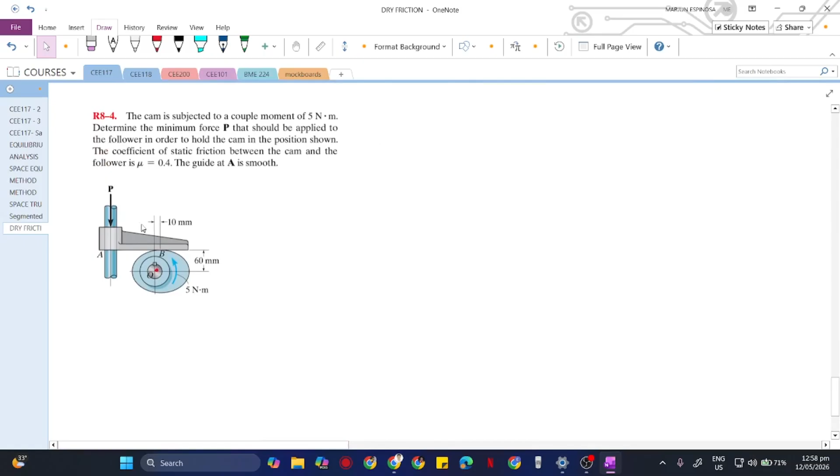Okay, proceed tayo dito sa next problem natin. Meron tayo ditong cam, yung cam, nag-rotate yan, yung cam meron niyang kasabay na follower. Parang system niya sila, dalawa class, cam and follower system. Saan ba to usually makikita? Makikita yan dun sa mga automated system, like for example stamping. Parang meron tayong cam na customize yung kanyang shape, pwedeng elliptical, usually elliptical yun. Customize yung kanyang shape, and then meron tayong follower, ganyan. So for example ganito, and then habang nagro-rotate to, eto naman magre-reciprocate yan, back and forth, ganyan, depending on the shape of this cam. Okay, yan yung cam.

Dito sa problem, the cam is subjected to a couple moment. Sandali lang, check ko lang. Okay, the cam is subjected to a couple moment of 5 Newton meter. Now, determine the minimum force P that should be applied to the follower in order to hold the cam in the position shown. The coefficient of static friction between the cam and follower, ito yung follower, ito naman yung cam natin, is 0.4, ang static coefficient of friction dito is 0.4.

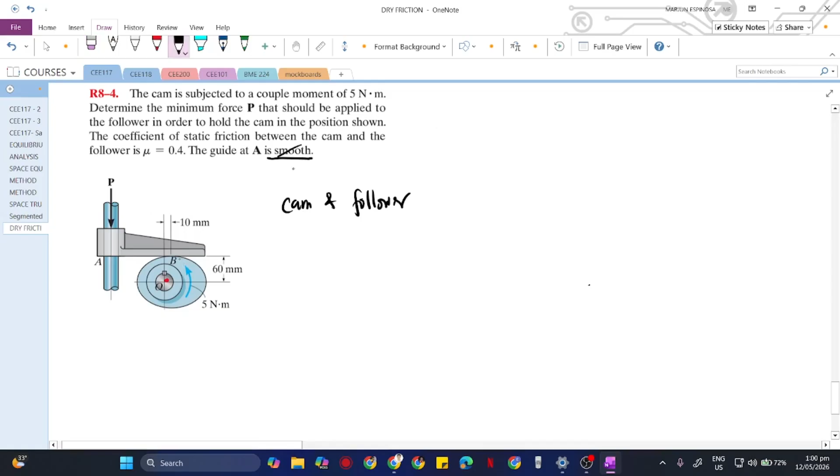Now, the guide at A, itong dito, yung guide natin sa follower, is smooth, meaning to say wala tayong i-consider na friction dito. Pero kapag ito, maglagay ng static coefficient of friction, then i-consider natin yung friction. Try natin later, magdagdag tayo dito, sabihin natin rough ito, tapos magdagdag tayo ng static coefficient of friction, ano yung mangyayari sa ating sagot? Now ang gagawin natin dito, class, is to solve for the value of P.

Dalawang components to, o dalawang bodies, meron tayong follower, meron tayong cam. Ang gagawin natin, hahatiin natin yung free body diagram into 2. Gawa tayo ng parang cam, yan, yan yun. And then, since nagro-rotate yung cam natin in this direction, 'di ba kung ano yung motion natin, resisting yung magiging direction ng ating friction. So most likely yung friction natin is pag ganito kasi yung rotation natin ng cam is pag ganito. It resists or it opposes the direction of motion.

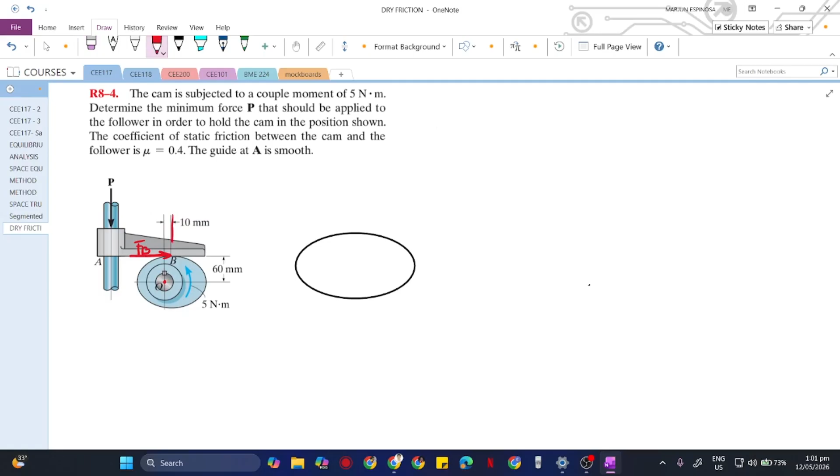Dito sabihin natin FB yan kasi nasa point B tayo. And of course, since meron tayong B dito, meron din tayong NB. As you can see, nandyan na yan, if this is our axis, this is our center line of our cam, so yung NB natin nandito yan. Kung kukunin natin yung follower na part, magiging baliktad lang yan, NB, kasi internal reaction yan. Kung i-draw natin yan dito, gawa tayo ng center line, indicating that is our itong point na O, ito point O yan. So meron tayong NB dito, and then meron din tayong FB dito. Ito yung NB natin, located yan siya 10 mm from the center line o center ng ating cam. Etong FB natin is 60 mm, galing dito sa ating center.

So this is what we call FB. Okay, FB yan. Aside from that, we also have a 5 Newton meter moment. So what we'll do is sum up our moments at point O and equate that to 0.

Considering counterclockwise as positive, counterclockwise... this 5 Newton meter is counterclockwise, so that means it's positive, 5 Newton meter. And then the rest will be clockwise, so those are all negative.

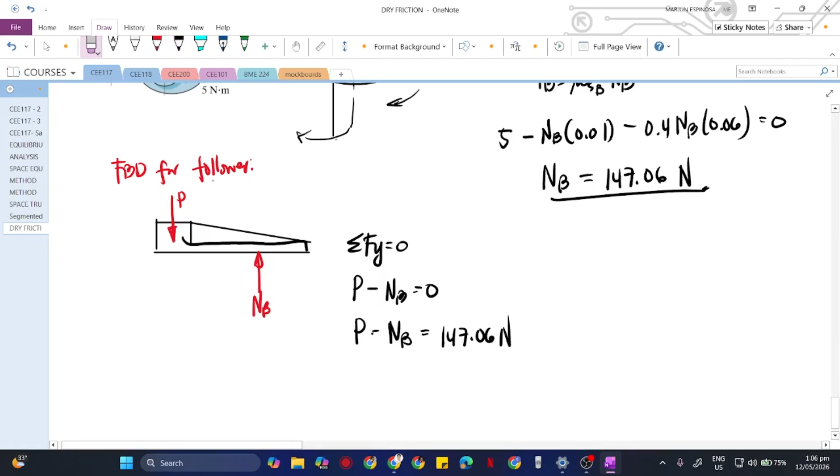If smooth guide, smooth is our A guide. Now, if we say that our A guide is rough, if A as our guide is rough, having static coefficient of friction at A of 0.5, let's say, find P. So how will we do that?

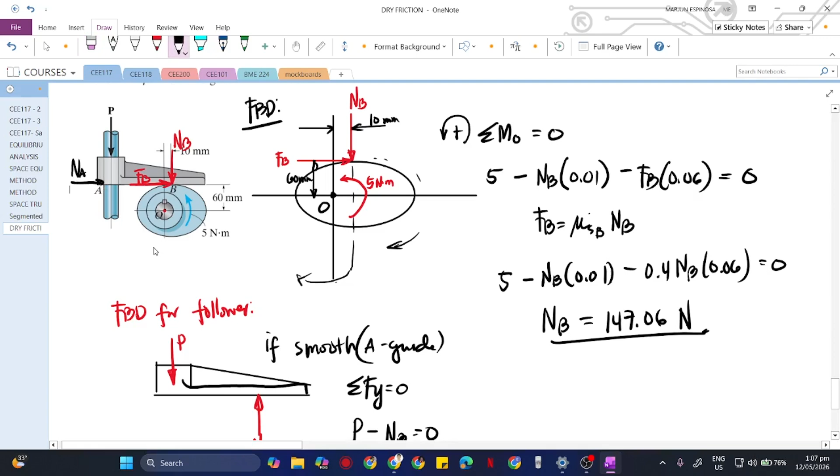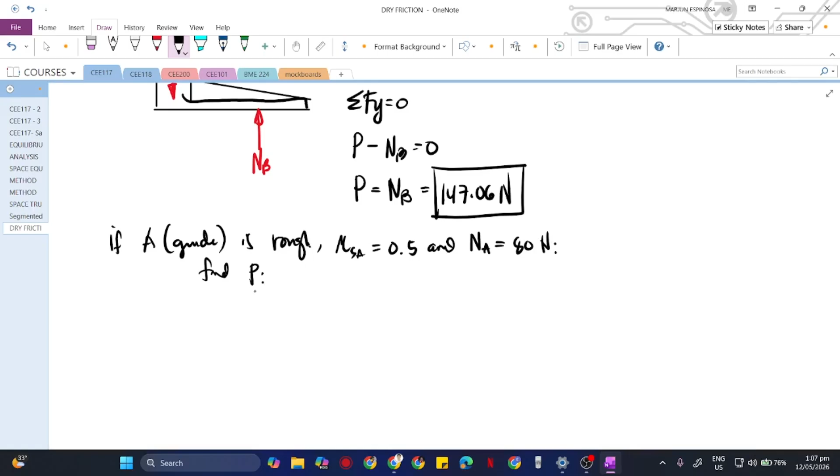So this free body diagram we'll add to, class? We'll add here our NA, okay, like this, normal, right? NA, which is 80. Then we have FA here, so that is opposing the motion.

So FA is equivalent to the static coefficient of friction times our NA, which is 80. So therefore, our P minus... okay, we assumed for forces along Y, positive is the direction going down. So here too, we assumed that. You might be confused why P is positive and NB is negative.

You can do it either way, it's just your assumption. And then we can say P, then minus FA, then minus NB, equate that to 0. So let's transpose.

So FA would be equivalent to... the negative FA becomes positive. So 0.5 times 80, then plus our NB that we got, which is 147.06. So what value do we get here, class? That's 187.06, right?

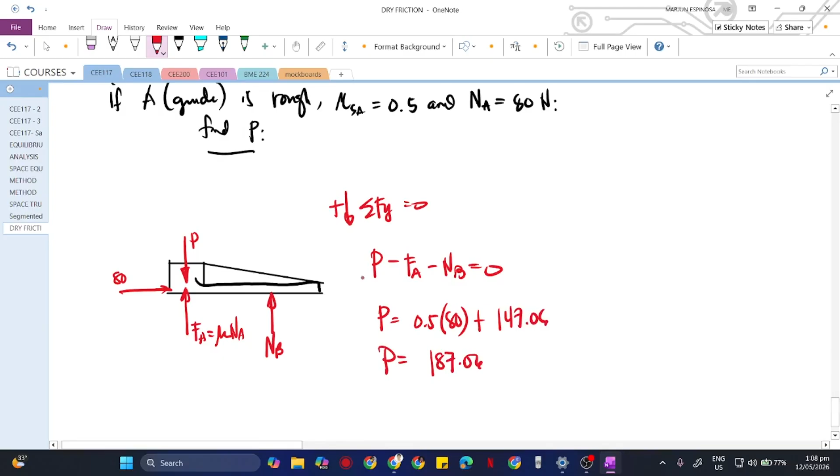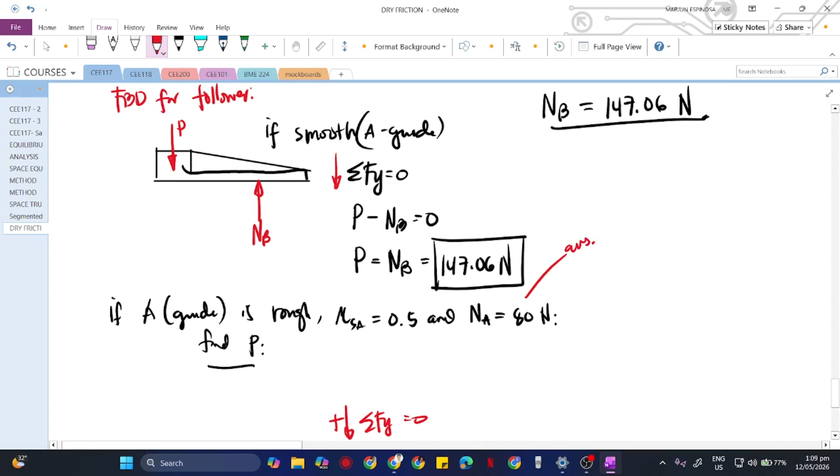Right? No. Okay, so this is the value of our P if our guide becomes rough. But in this problem, it's smooth. So therefore, the real answer here is this 147.06 Newton. I hope you got the concept of friction. Is that clear to you, class?